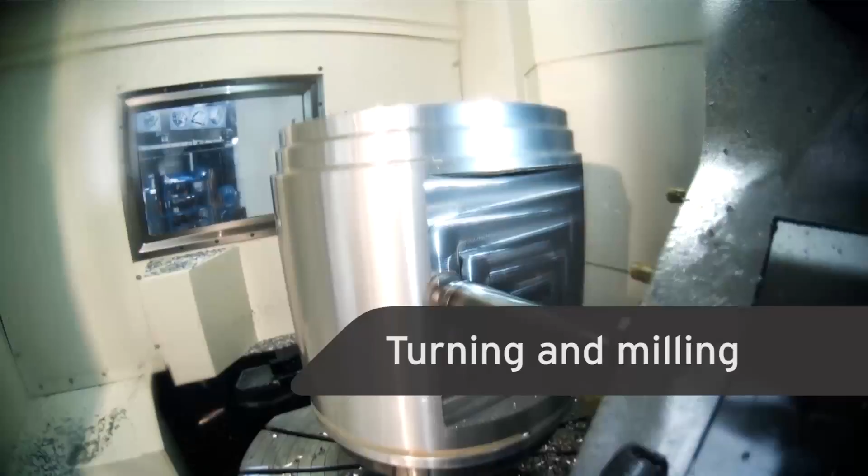And what products are you selling into the industry? Everything from 2D machining up to 5-axis simultaneous machining. So we do 2D full production machining, 3-axis, 3+2, full simultaneous 5. We have mill-turn modules, wire modules, and also a robotic solution.

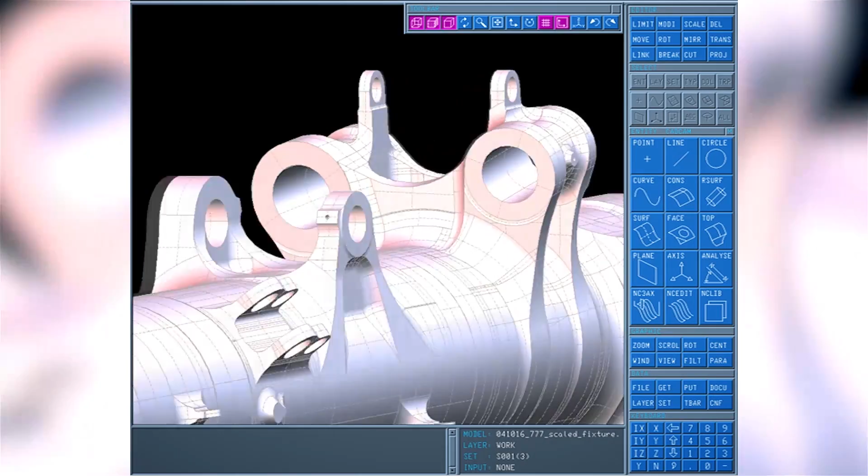And on my travels around Europe, I've seen TEBIS exhibit a lot, and the big emphasis has always been sort of automotive. Is that something that you're concentrating on in the UK? No, in the UK we're now trying to aim at the aerospace industry and the small, medium enterprises. So a lot of the technology that we've built around the automotive market is transferable across to the aerospace type market.

And within the UK, what is it you've got to offer? Because you've mentioned you've got offices in the UK, staff members, what can you do for those small to medium-sized companies, those blue chip companies within the UK? Okay, so typically we've been aimed at the big blue chips, but we've got a dedicated sales and support team, which are all actually engineers by trade. So we actually understand the problem of the customer, and we can provide a solution around that. So we're going to listen to their needs and requirements and build an actual solution and demonstrate that and actually prove it out on their machine tool.

And I think that's really important, because talking to engineers, it's easy to solve the problem. If you don't have that sort of emphasis of engineering background, it's very difficult, isn't it? Yeah. I mean, we're talking the same language, so it's easy for us to actually create that solution for them.

Now, you've got a quote online, and I really like it, and it says, TEBIS can improve your competitive advantage and increase your profitability. Now, everyone wants that. They want more efficiency, they want to be saving money and making more money. How can TEBIS do this? Well, we've got a few core packages that we actually work around, which are very cost effective, but we have then a series of modules that we can add on pieces of functionality to make the system correct for the customer. So they don't have to buy a great big package and only use 50% of it. Therefore, we're actually quite cost effective on that front, which is giving us opportunity in the smaller type companies.

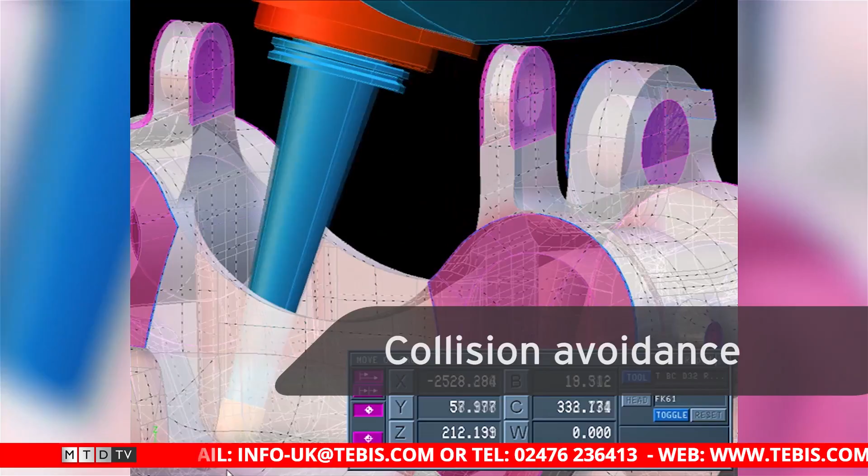So you're saying to me then that I've got any machine, you come to my company and say, okay, the limits of that machine, we will work within those boundaries. Is that how you're selling TEBIS to me? Yes. So we understand the full kinematics of that machine tool, the rotational limits, etc., especially on 5-axis. So our toolpaths are automatically created within that envelope.

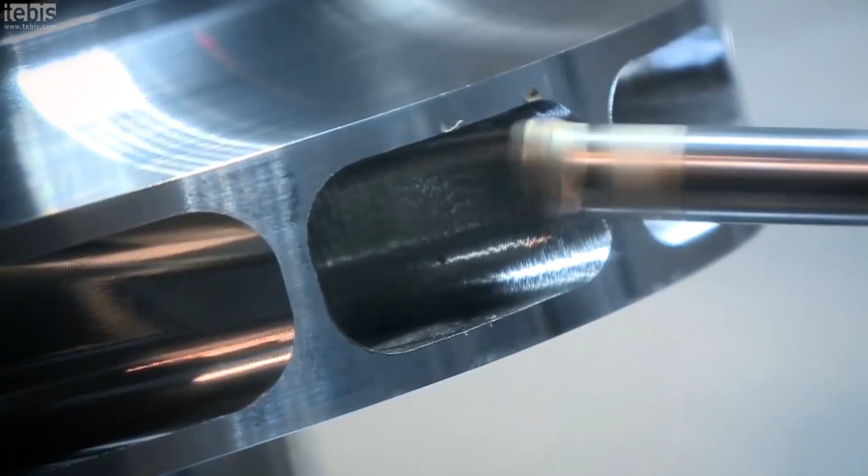And how do you do that? Well, we've got a standard range of machine tools in our virtual machine environment. But if there's something special, something quite different to the run-of-the-mill type machine tools, we can actually come in and scan that machine and reverse engineer that machine to build a new virtual machine in our database. So we can do all of the necessary collision checking. So it's standards and it's specials. Yep. Medium, small companies, big blue chip companies, and pretty much you're willing to take on any machine. Yeah, no problem. Any machine is no problem to us.

So your growth is very much the mid-sized to smaller engineering rather than the big blue chip automotive sector that you're coming from too. Yeah, I mean, obviously we're still going to serve our big blue chip companies, but we're now more attractive to the smaller type company with our restructuring of the packages and the modules.

It's now actually quite cost effective to actually take a look at TEBIS and see what we can do. Brilliant. Well, thank you very much.

We're going to find out a little bit more about some events and how people can get in touch with TEBIS a little bit later. However, Paul is going to head over to Technical Corner and he's got a little bit of a challenge on his hands.

Phil, we've learned a lot about the business with Gerry there and Lyndsey and Mark on the sofas, but I want to put myself in a position as an engineer that maybe has just bought a new machine tool or has got an existing machine tool, and I'm about to buy a CAD-CAM seat. There's a lot of options for me in the marketplace. I want to find out why TEBIS should be considered.

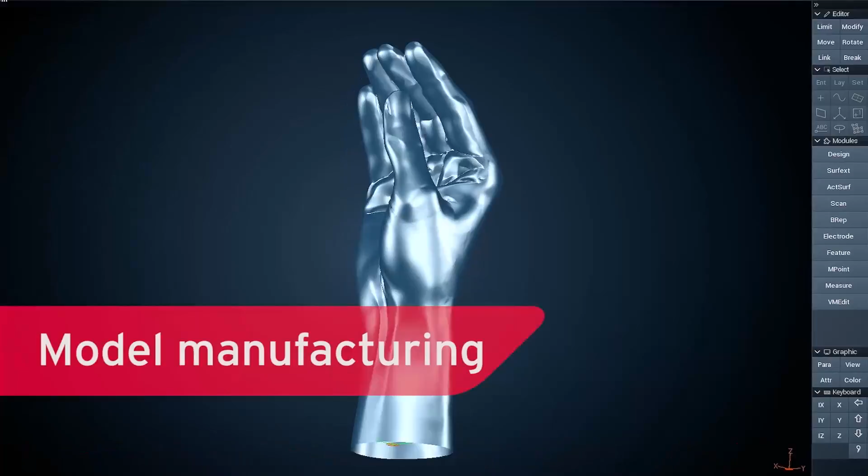Well, with TEBIS, because it's an integrated CAD-CAM system, you get the benefits of the CAD, the CAM, and also reverse engineering, as you can see with this component. So the idea is we want to automate as much of the actual process as we can to make it easier for the end user.

So instead of clicking the buttons, we try and actually use templates for starters, or we use feature recognition with CAM cycles that are linked to those features to, in effect, make one operation. It could be 4 operations in effect, and it will machine and automate the process faster for the end user.

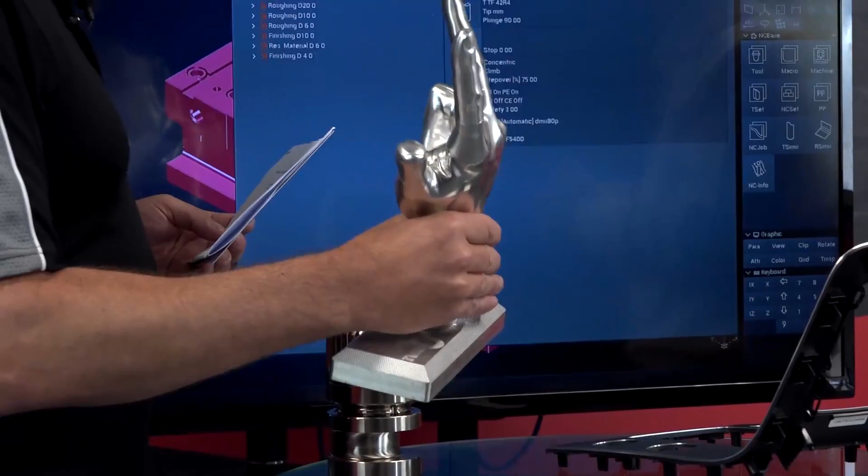Okay, taking a step back a bit, let's use this part here as an example. Let me imagine that I've got this as a contract and this is a new component for me. I've got the machine tool, but now I need the CAD-CAM package to either reverse engineer this or to create the program to make this. Why is TEBIS going to be better at this part?

Well, with this particular part, it's because of the TEBIS solution as well. We've done everything from the start to the end. We've scanned a hand, one of our colleagues' hands. We've then manipulated the STL to clean it and then surfaced the STL to machine. Tell us what STL is.

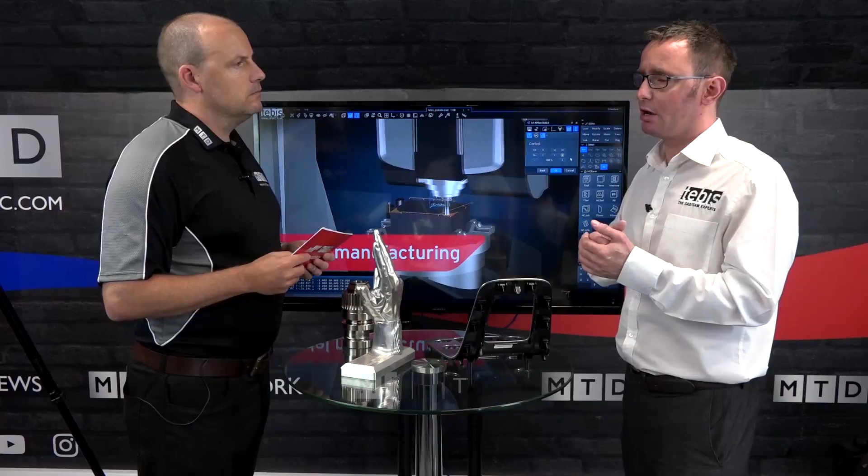So STL is basically triangulated data, which has been pulled in from, for instance, Faro or Steinbichler. With Steinbichler and Faro we have a native interface, so you can actually use the Faro arm to scan directly into TEBIS. We do it with scanning of machines, for instance, virtual machines.

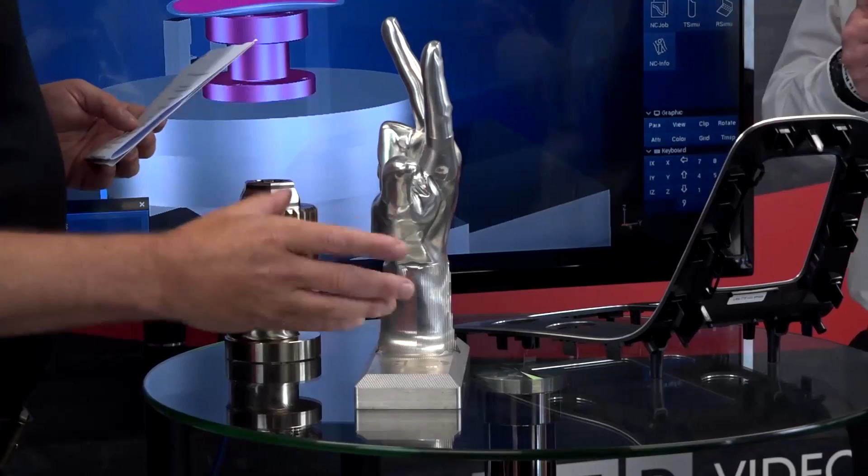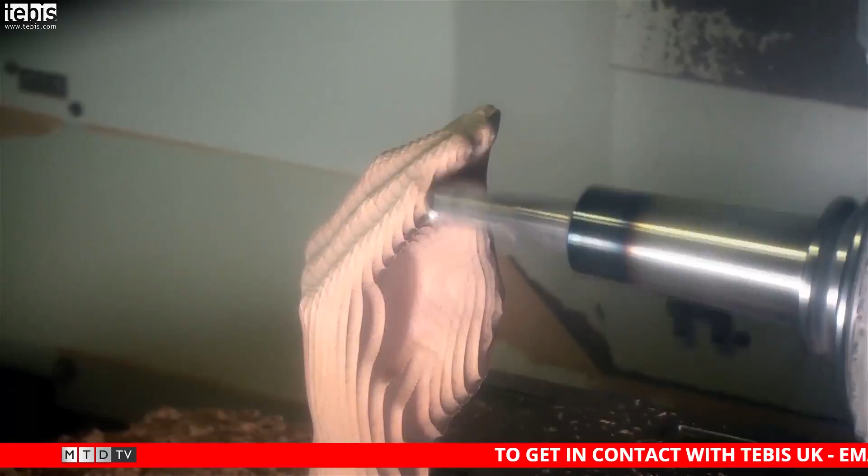Right, but once I've done that and I'm going to start to machine this part, how do I know that I'm not going to have a collision? Well, good point. We have inside TEBIS a fully integrated simulation package, which is integrated to the post-processor. When we simulate, all the movements inside the simulation are connected to the post, fundamentally. So what you see here is what you actually get out of TEBIS.

So you don't get any issues with maybe 70% or 80% accurate. We have all the macros, so from one toolpath to the other toolpath, there's actually a macro linking those toolpaths. Where other packages may just go from here to here and let the controller take over, we actually manage the macros, which is fundamentally a key point with our software.

So you're 100% certain then you're not going to have a collision? 100% sure. We're building these macros. We're building safe positions for the machine tool to go to. We can even take into account the acceleration and deceleration of the machine. And how do you know my machine though?

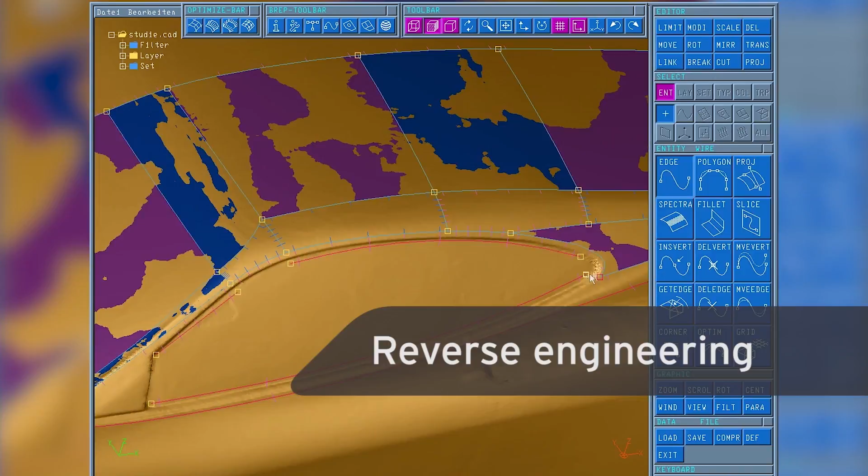Because we look at your specification, say for instance for XYZ machines, and we take that information and insert it into our virtual machine technology. That means we can look at the processing time, the look-ahead time, the actual acceleration and deceleration that's been recommended by the machine tool vendor.

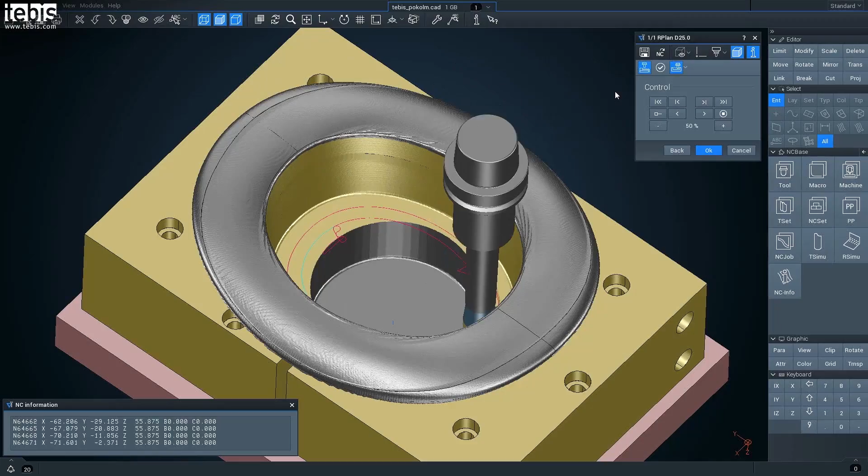I notice on this part you've got an extremely good surface finish here. Are there any elements of your CAM software that generate that? So normally we tend to get a really good finish with TEBIS, but if you want a more accurate or very fine finish, we have the ability to do point distribution, which will increase the quality of the surface if you need this.

But fundamentally, what we normally get out of TEBIS is good enough for a good quality surface finish. But a lot of our mould and die customers are pushing us for a perfect finish without any hand finishing. Okay, do you consider the TEBIS software as being one of the best at producing surface finishes on parts like this?

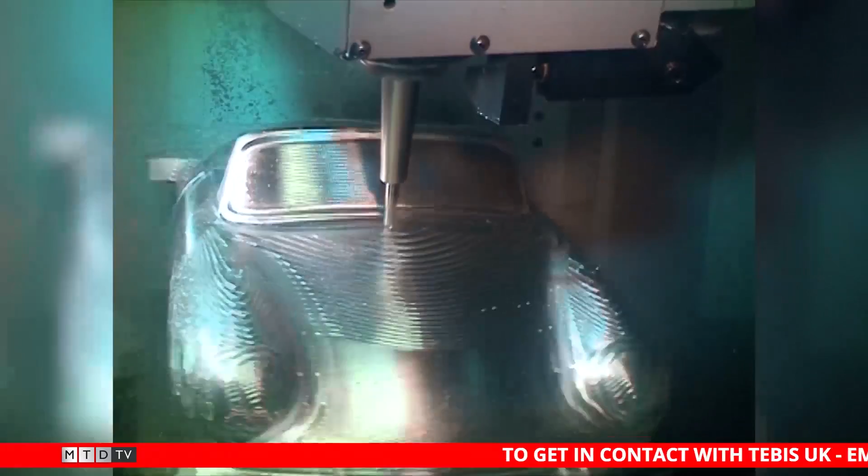So as far as I'm concerned, and I've been with TEBIS for over 5 years, the quality of the surface finish that we get is outstanding, and our strength is the surface finish of the component that actually comes out of TEBIS. So we try and limit the actual hand finishing requirements for harder materials or even softer materials.

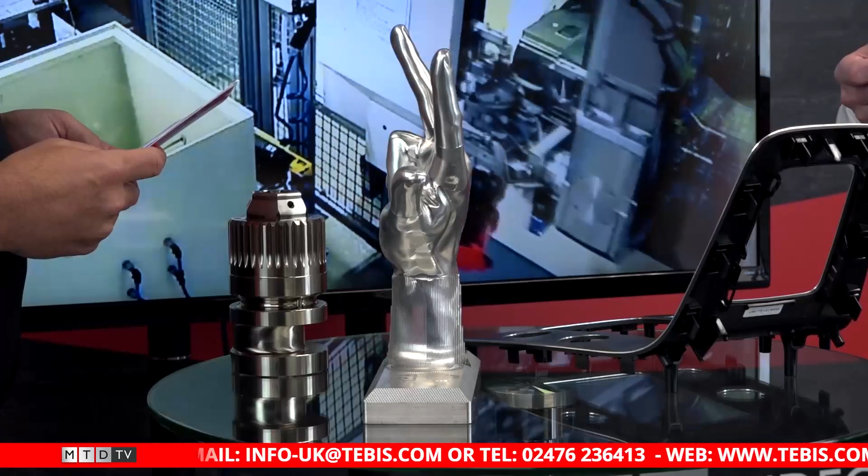Two other things, well, let's start. One of the other points that I'm interested in is things like tool wear, because as an engineer, I'm also looking to make sure that I'm getting the best out of my tool life. How does your software help with that? Yeah, so inside TEBIS we have what we class as the manufacturing technology, and with that what we get is an accurate tool library.

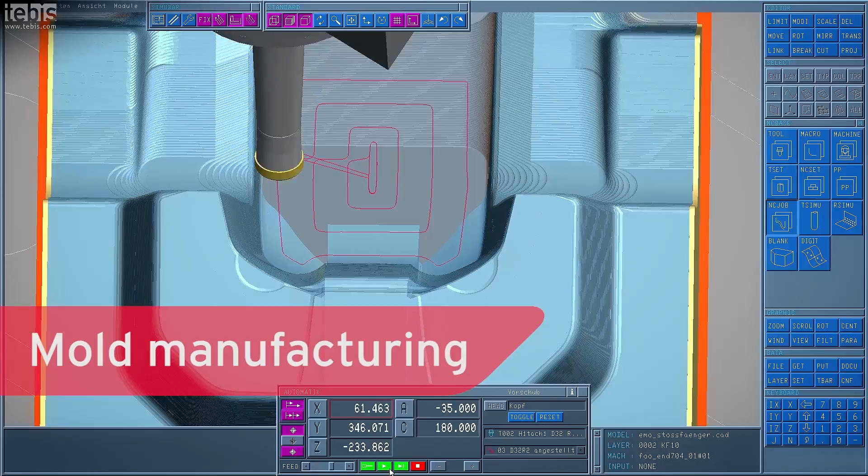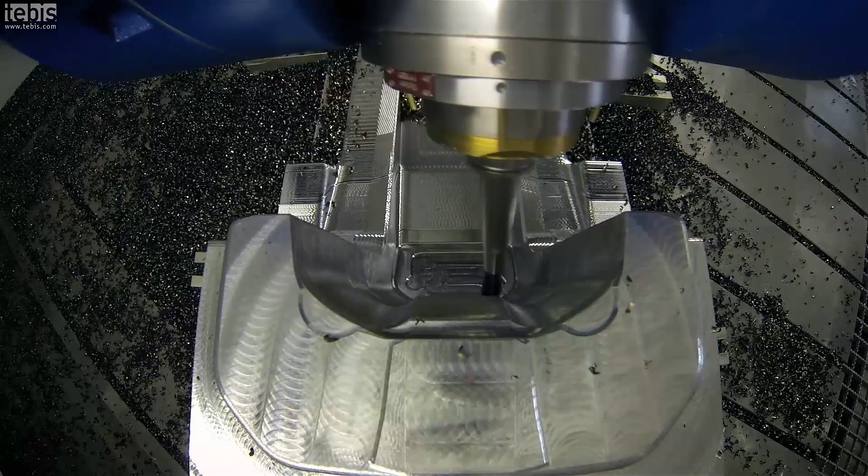Inside your tool library, it could be a tool that's an angle head, it could be a turning tool, it could even be a high performance tool. So we actually generate a true representation of that actual profile. So when we produce a toolpath, it's actually accurate, and you're not guessing in effect. You actually get a true toolpath, a clean toolpath. And with all this, we get a better finish, and we don't leave material on for the next tool. So we don't damage the tool, and we get a better tool life as well.

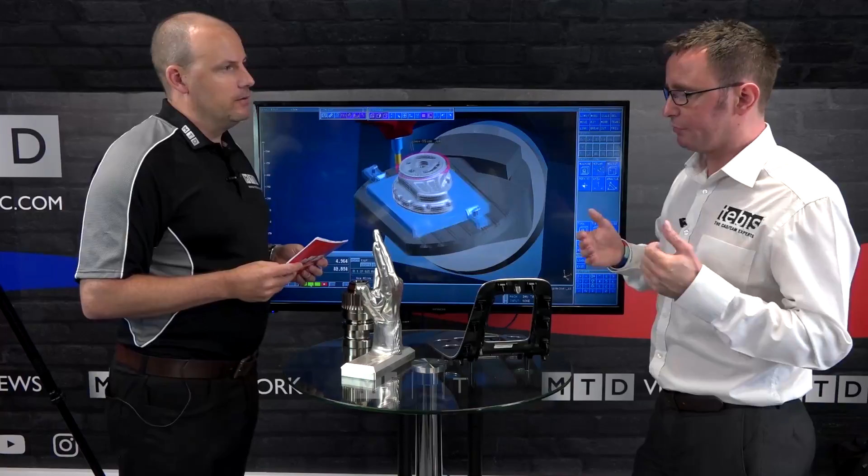The programming side is important. That would be my next point. I'd be looking at how easy is the software to use. You know, have you got canned cycles that I can quickly use? What are the strategies like within the software? So we have strategies from 2.5D all the way up to 5-axis. We even have robot solutions as well.

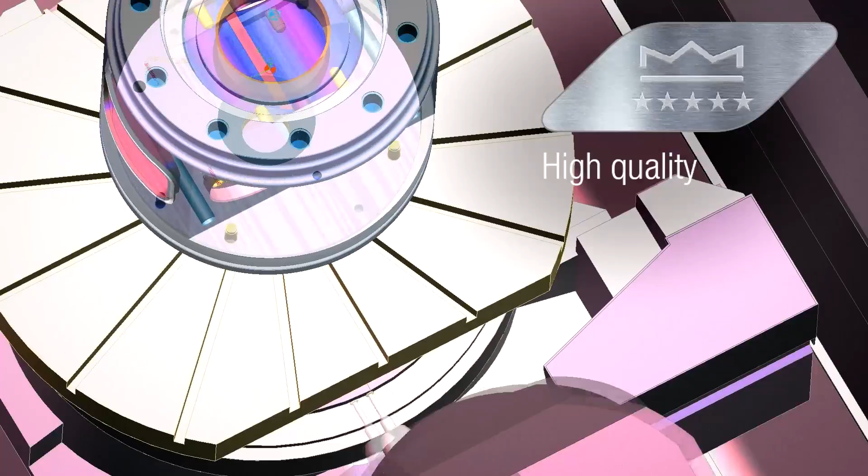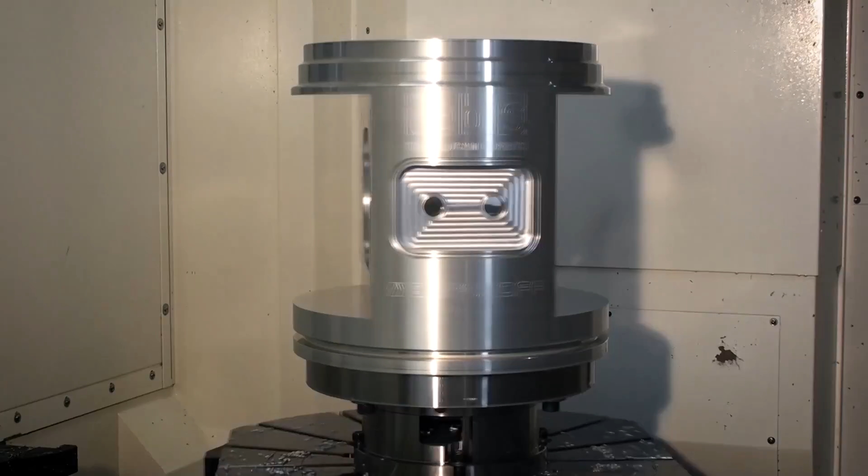But if you want to break it down into how easy the software is to use, what we do for customers is we can have feature technology, which is basically pockets, slots or 3D elements, and we can produce canned cycles linked to this feature technology. So once we've built the library and connected the features and the canned cycles, so a drilling operation or a tapping operation, it makes life a lot easier and a lot more automated for the end user.

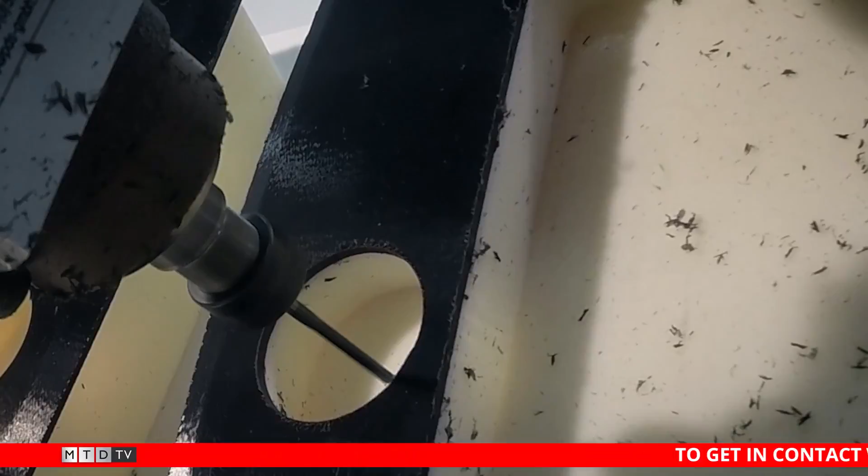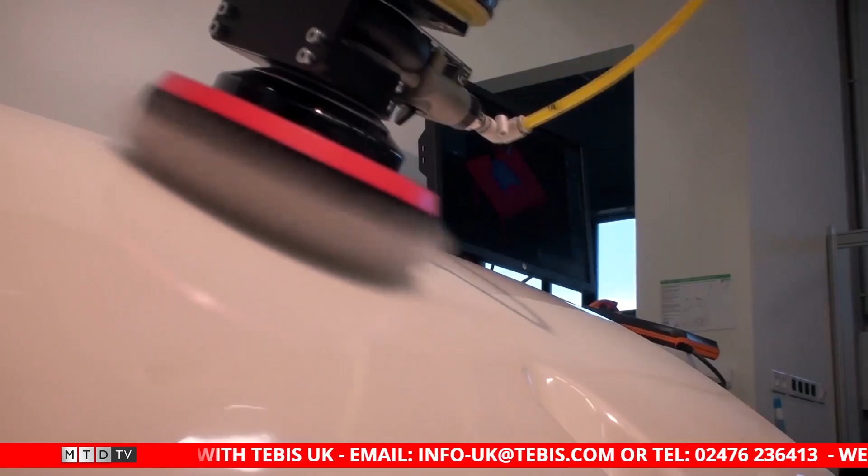We even then go to the next level, which we call auto mill, which is 70% automated. We can tell it to look at a layer, and we can tell it to look at a colour on that layer for that surface. And then we can have templates inside TEBIS to rough, re-rough, semi-finish and finish the actual component. So the days have gone where you would click, click, click to get a toolpath. We want to make it as easy as possible for the end user.

And how long would it take me to learn? I know you've got different modules, and it depends on what you're doing, anything from simple machining up to your 5-axis simultaneous. But how long is it going to take me to get familiar?

We normally do a course for CADCAM for 5 days, and that's for the end user to go at minimum 3+2, where the end user can do CAD and some analysing of the CAD, so you might want to check for radiuses or undercuts, ready for a manufacturing process, and then also to understand how to build his tool library and how to produce the toolpaths ready to program the part. So normally 5 days is fine.

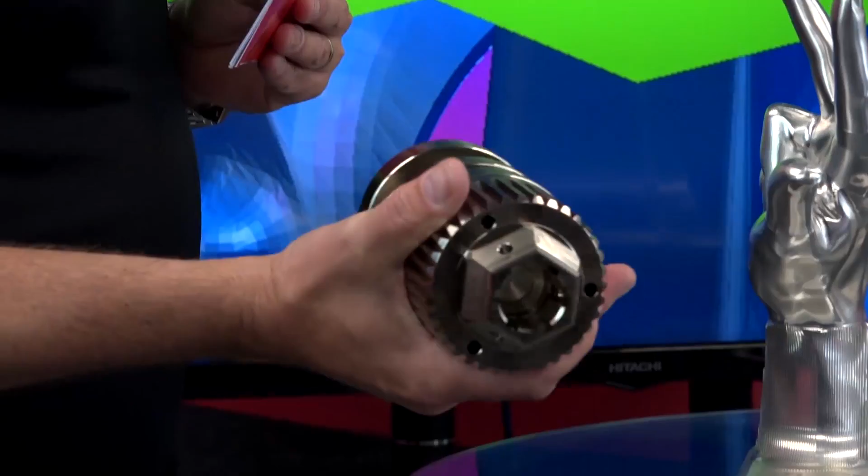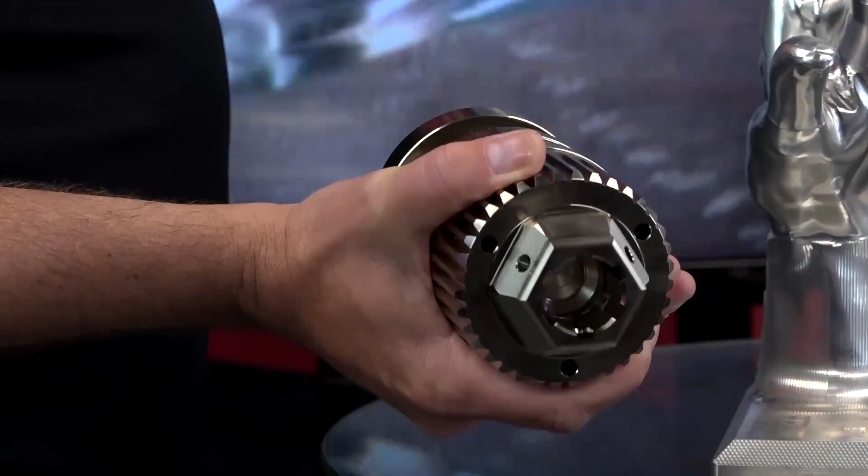Moving on to this part here, part 2, Phil. Okay. Now this is a classic turn mill component. There's a lot of features on here, pretty complex part out of a fairly difficult material by the feel of it, and by the look of it. There are lots of good quality CAD-CAM systems on the marketplace. I've just won this, I need to program it. Why TEBIS? What's better? Good question.

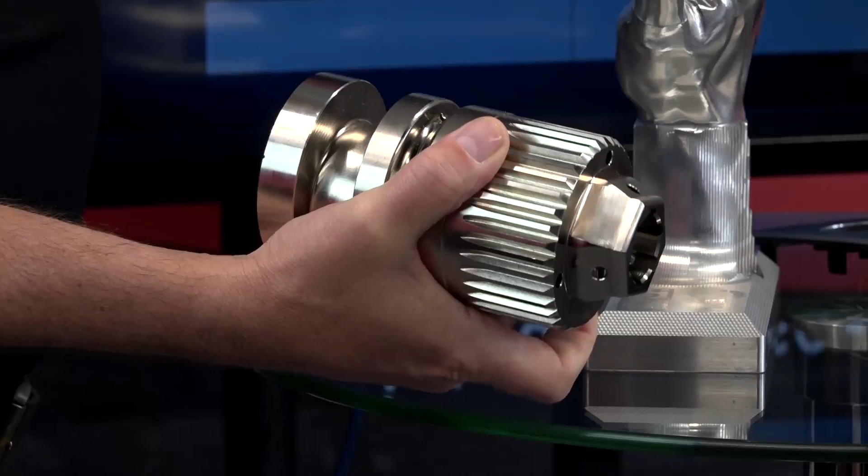With TEBIS, as I've said, we have the CAM package and we have the turning package. So if you can mill 3+2, the functionality and the settings are very similar when you're turning. So you can migrate from milling to turning without that much training, to be honest. The icons are very similar. The functions are very similar. The strategies are going to be different, but the buttons are in the same position.

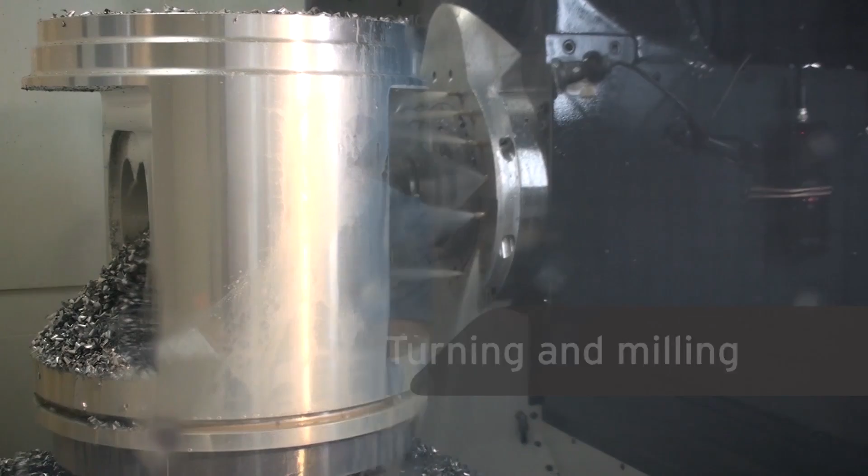So it's very easy to go from milling to turning, and with the functionality in TEBIS, we collision check everything with the tools, the material tracking inside, and also the virtual technology, which helps us understand where the part is and collision checks the whole component with the fixtures and the moving parts of the machine. So with all that working in harmony, it makes the programmer's life a lot easier.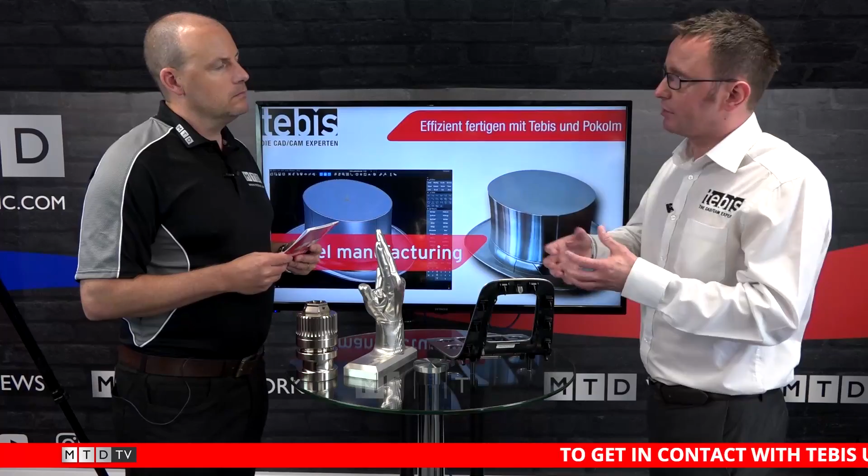So that's one of the main reasons why I would say TEBIS is better compared to other solutions. But if I look at something like that, what am I talking to be able to program with TEBIS? To program that from the start, I would say maybe a few hours.

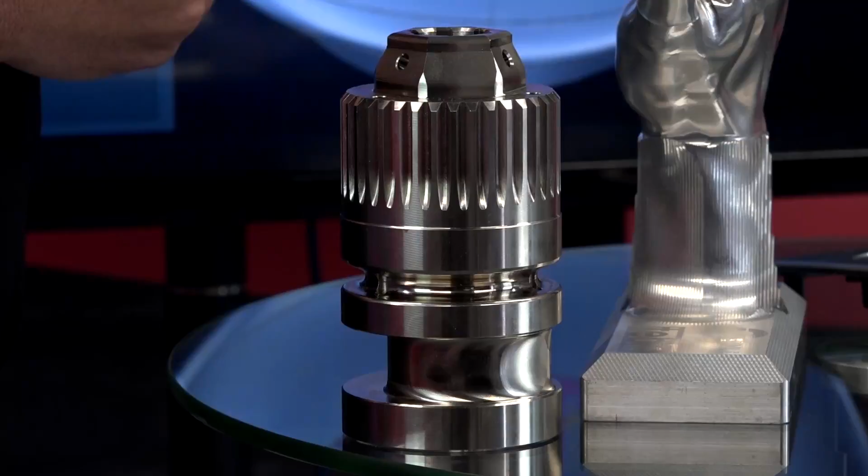So once you've built the tool catalogue and the libraries, and you've got the machine set up with the post-processor, it's just a matter of understanding how you want to machine it, what strategies you want to use, milling or turning or roughing or finishing, and actually apply it to that actual component, and then the end result is to output the code.

We have touched on reverse engineering earlier as well, but that's a part of TEBIS that you've pushed heavily today as well, isn't it? So reverse engineering, as I've been saying, it's one package for everything. So that could be CAD-CAM reverse engineering with simulation as well. So we have a very strong reverse engineering package. So the ability to scan components, manipulate the STL, and also surface it. And also we have the ability to morph data as well for compensation, for example.

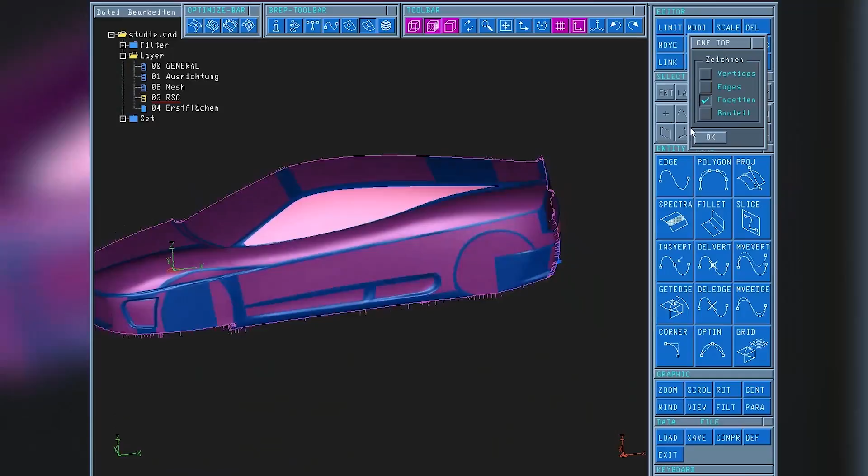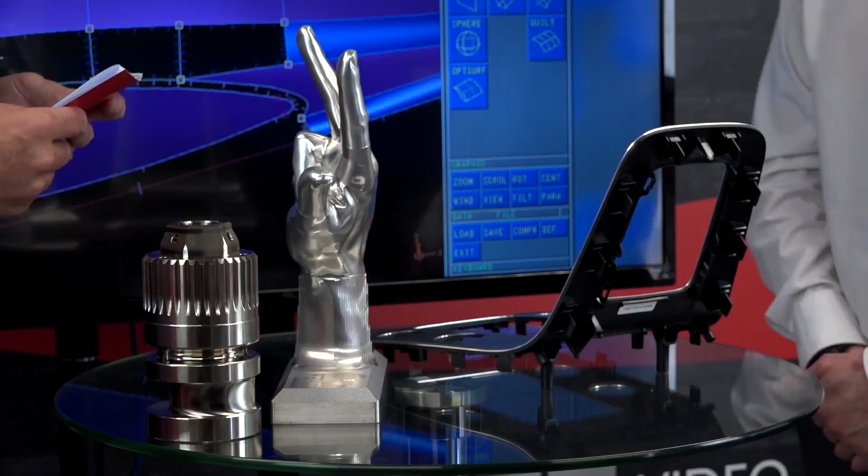And looking at CAD and CAM, where is TEBIS with this? Is it your own CAD and your own CAM? What's the relationship? Yeah. I mean, TEBIS has been going over 30 years. All our solutions are developed in-house. So in Munich, we have developers that are constantly developing the software. We normally get 2 releases per year. So the answer is basically all our software is developed in-house, so we can always tweak it and change it and develop it to make it even better to actually give it to the end user.

I've got a couple of points here as well that I'd like to mention that I've picked up from looking at your website. Accurate tool libraries, what do you mean by this, and why is that advantageous in comparison to maybe others? Yeah, good question. Because we want to collision check everything in a virtual world, we want to make sure that everything is designed and built up in our system. So it helps us program from the start, because what we're trying to do is build the tool library to a perfect representation. So even the cutting edge we put inside TEBIS, to the holder, to even feeds and speeds, depth of cut inside the tool library.

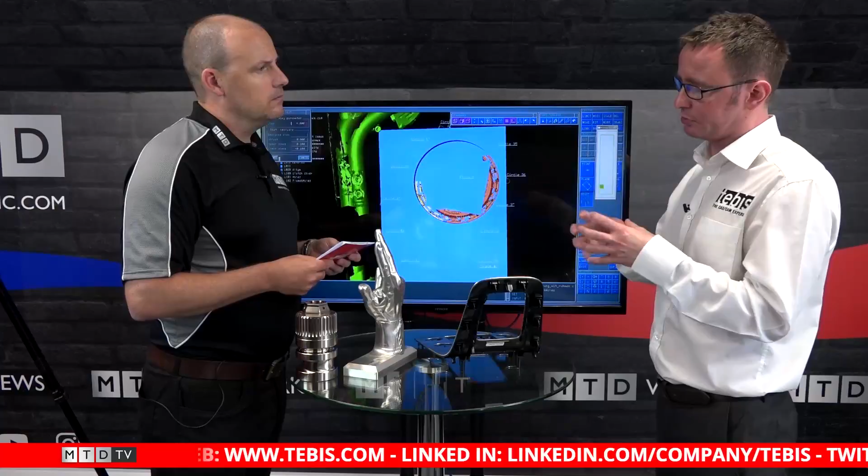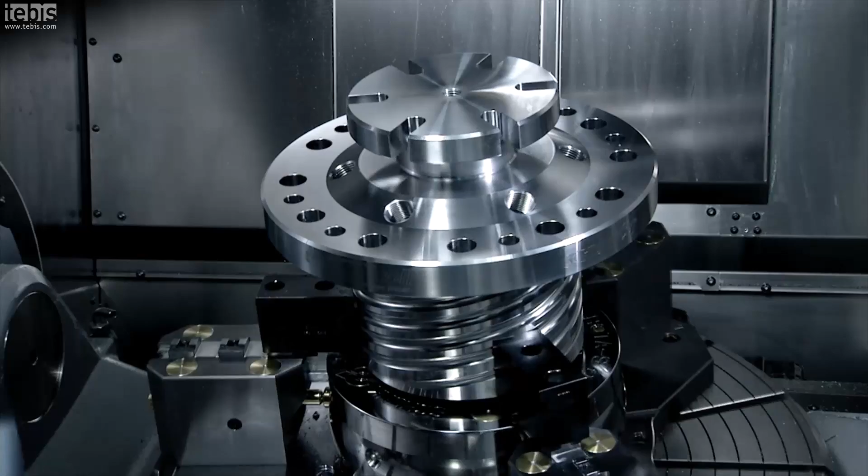So what we're trying to do is from the start build all of the technology inside with the feeds and speeds, depth of cut, so we don't have to do that when you program. All we have to do is pick a material type. So it could be graphite, it could be stainless steel. You pick your material types, and basically TEBIS will then give you a feed and speed, which is calculated on maths, and will give you an accurate depth of cut as well, and you can calculate from there.

And how hard do you work as a business to keep on top of that? Because tooling changes, materials change. Yeah, so we're constantly working with tooling engineers and constantly working with our partners to actually understand what the best tools out on the market are. So we've got adaptive roughing techniques, we've got high performance cutting techniques. So all this is working with partners outside and understanding what they're doing so we can put it inside our software. So for instance, adaptive roughing has been in the market for quite a long time.

We're also looking at high performance tools, barrel cutters for instance, where instead of going down a wall doing maybe 0.5 depth of cut with a 5-axis toolpath, we can actually do 4 mm depth of cut on a barrel tool, where you're producing the part quicker for the customer. Another point here that I've got is 5-axis feature recognition with canned cycles.

Now, we have spoken about canned cycles already, but it seems to be a big part of what you're trying to promote. Yeah, definitely. We call it inside TEBIS auto mill. So basically what we do is we build a library of features, and then we link those features to manufacturing techniques or canned cycles, as you say. So the idea is we will build up a number of libraries with variable settings.

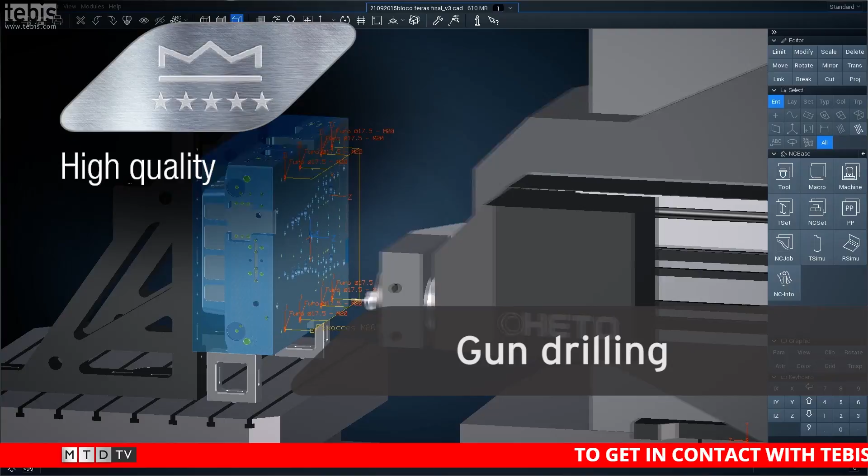And give me an idea of what a canned cycle might be. So a canned cycle could be a centre drill tap, for instance. Or it could be we want to have a pocket and we're going to machine it from a solid billet, and we're going to rough it, finish it out, and then chamfer it afterwards. So it could be 3 operations, it could be 6 operations. And what if I wanted to put those 2 canned cycles together? How easy is that? It's just a matter of linking them. It's that simple.

What they actually are inside TEBIS, they are variable. So that means the actual system can go and select a tool itself, or you can have it fixed. So with the features, it has the ability to manufacture the part quicker than you would do it manually. You say it has the ability to select a tool itself.

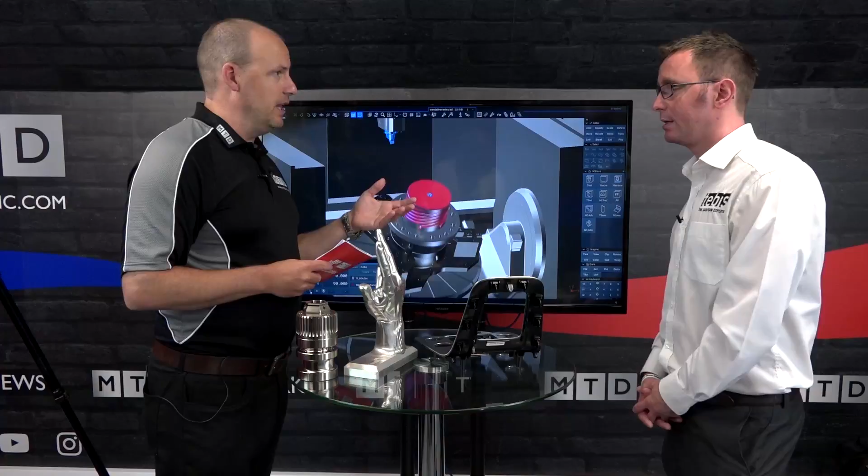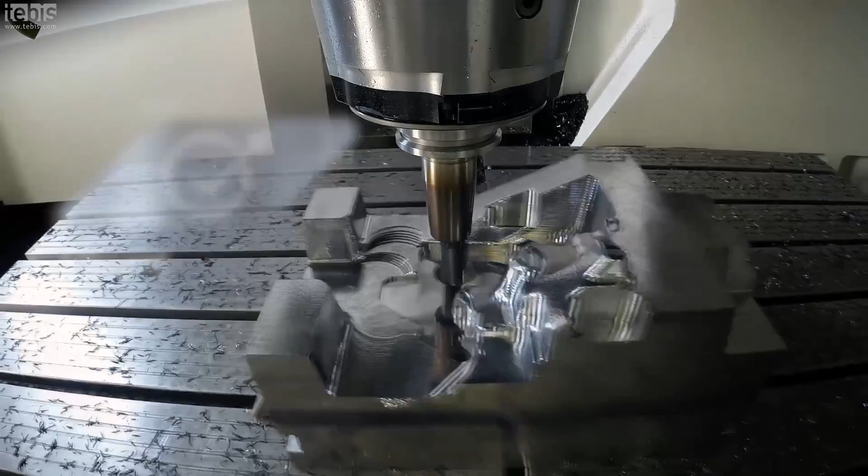So I've got a tool magazine, I've got 40 tools in there, and the software is going to be able to predict or pick the best tool for the job, correct? Yeah, on variables, on settings. So basically what's it going to look at? So what it will do, it'll look at the feature size for starts, and it will look at the radiuses and the actual chamfer, and it will go away, look at what's actually available in the tool library, and pick the tool that will fit that pocket or hole.

So we're seriously de-skilling the machining process here. Definitely, yeah. So we're trying to make it as fast as possible to get the part from a billet to a finished article on the actual inspection table, without an individual having to go through all the possibility of maybe making mistakes or, like we said, getting it wrong. Definitely. So we're trying to actually input all the technology inside TEBIS.

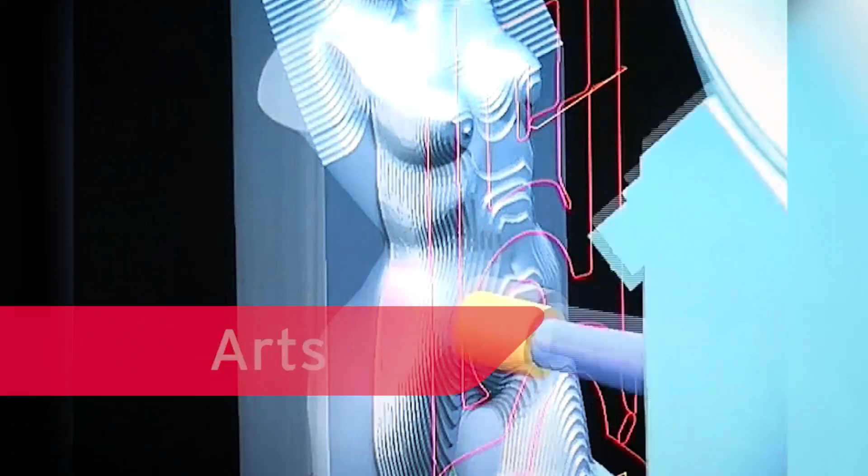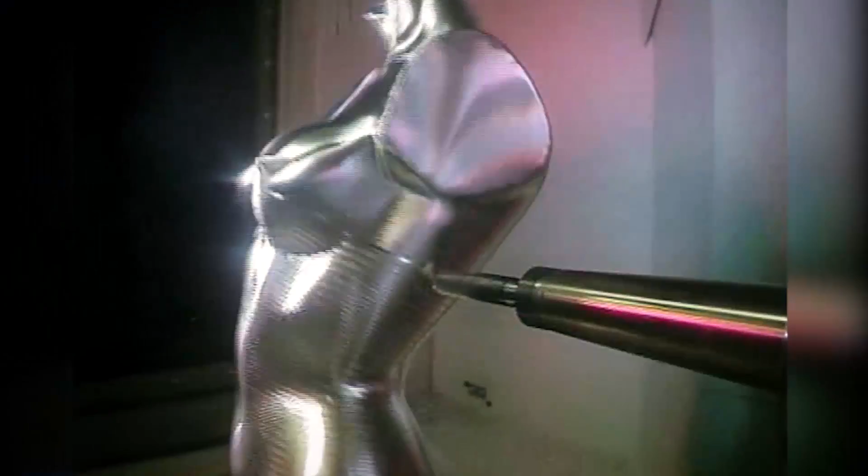So we're trying to give it the strategy, we're trying to give it the tools, we're trying to give it the machine, the feeds and speeds, even the actual magazines. Inside the machines, we will have a number of magazines for any type of machine. So instead of going tool 1, tool 2, tool 3, it's already done for you. You just basically link the machine tool library to the actual tool table, and it will output correctly.

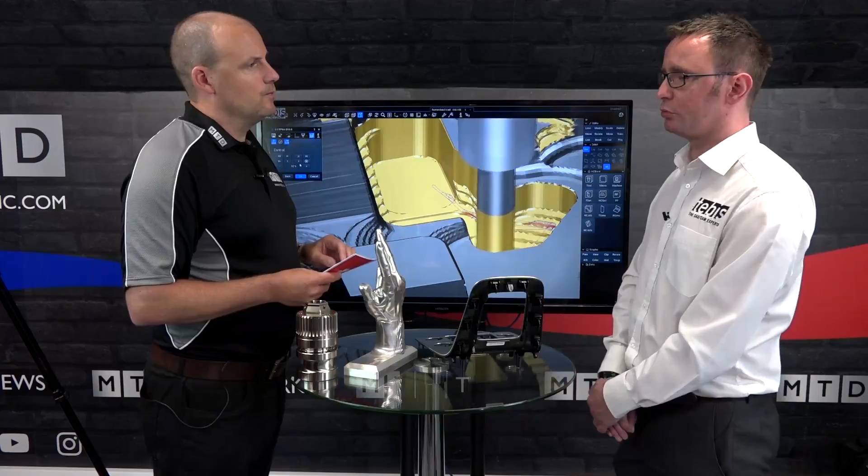So I want to move on here, Phil, to something we've highlighted here as swarf machining. And one of the things is your 5-axis trimming. This is obviously a classic automotive part, but tell us about why you're so good at that. So yeah, we've developed bespoke software for trimming from day one. It's not our standard 5-axis milling package, it's a separate module. So it gives you the ability to produce a toolpath and also modify the toolpath on the fly.

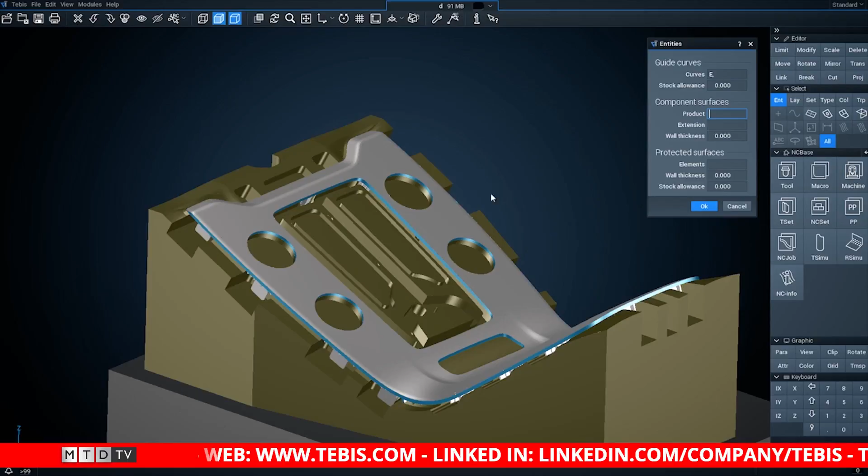So this for trimmers is fundamentally important, because a lot of the time the head is in the way, or the vectors. If you get CAD in and the data is not so good, what we can do is we can clean the toolpath up live, ready to go on the machine. And the beauty about this is, what comes with the basic software is collision checking against the head and the spindle, the collet and the holder.

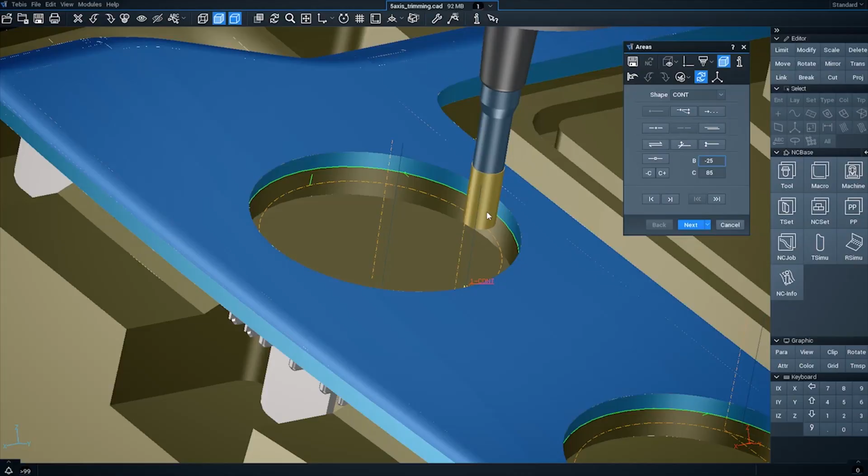But trimming is essentially just around the outside of the component, correct? It is indeed, glorified deburring. Yeah, it is indeed, but unfortunately you get a lot of unwinds with conventional milling strategies. And when you unwind and you come back onto the job, you have a witness. And basically with our software, we're planning from the start to the end to get an accurate toolpath. So if you've got a limit of 180 degrees, we're not going to get round it in one operation. So we have to understand that we're going to start from one point to the other point without an unwind.

And I know this is a big part of your business. It's something that you are very well known for. Yeah. And then to finalise, we've got 5-axis laser, and some of the areas we've already spoken about, the mill turn, the turn mill, but robotics, 7-axis machining, polishing, laser, welding, undercut machining. Finish off with those. So yeah, with the robotics, it's been in the module for just over 2 years now. It's constantly being developed. It's one of the key aspects that we're pushing at the moment, robotics.

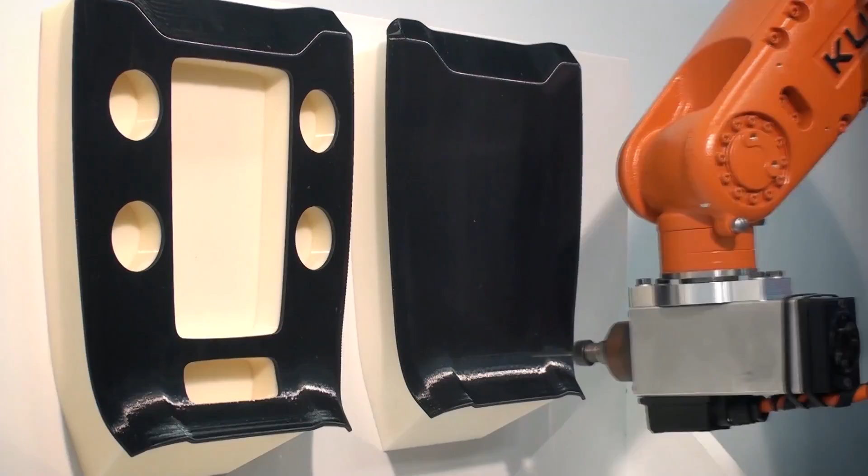So this gives you the ability to use any milling operation with a robotic solution. As in the turning, the toolpath is exactly the same. You just apply the actual robotic solution and understand what the singularities are within that robot. So it could be KUKA, it could be Kawasaki. But fundamentally we build in, once again, the virtual machine technology inside the robot with the limits, and understand how we use that robot to program or polish or weld the actual component.

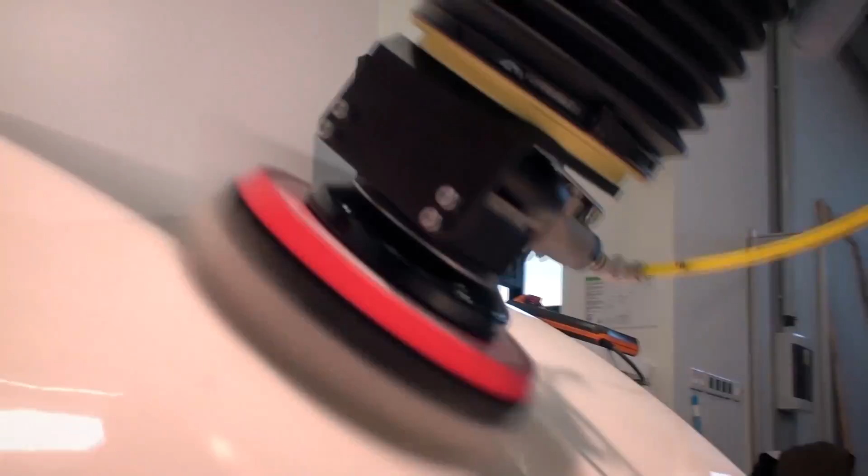I started this session here, Technology Corner, talking about the fact that if I was a small subcontract engineer, maybe with just a 3-axis machining centre and a CNC lathe, I can get the benefit of TEBIS' software, can't I? But you've just been talking about automation, 7-axis robotics. You go from one end to the other, correct? Definitely. So we go from one scale to the other, but it doesn't matter what you're doing in the industry. If it's a small business or a large business or an OEM, we can cater for that. So if you're trimming or milling or turning or even using robots, TEBIS can actually do the job for you.

So it's going to make you more efficient, it's going to get those parts off of the machine faster, and it's going to be easy to do as well. Definitely. So with the templates and the automation, this is the whole idea, is to make it as fast as possible for the actual user to get parts off their machine.

So looking at the fact that there is a lot of options here with your software, depending on what sort of manufacturer you are, is it competitively priced for all? Yeah, I believe so. I think you'll be amazed with what you'll get for the money. So yeah, I think at the moment with the new modules, it's fine. It's good for you. Good stuff.

Thank you very much, Phil. Yeah, thank you. Back to the chairs. Thanks, Phil and Paul. We are now joined by Jill Brennan, who is the Sales and Marketing Assistant for the UK. Welcome to the show, Jill. Hello, thank you very much.

I'm going to quiz you about events because I want to know, and I'm sure our viewers want to know, where can we see TEBIS in action? Okay, well, first of all, at the end of this month, we have our open house. It's our annual event and it's being held in Munich, Germany, which is our headquarters. And then we've also got a number of exhibitions that we're going to be at this year. We're going to be at EMO in September, and then we're also going to be at Interplas with our partner Maca, and also Advanced Engineering in November.